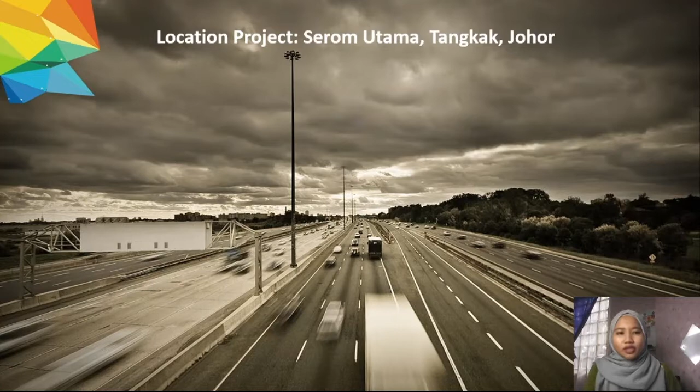Assalamualaikum, my name is Siti Nur Fatihah binti Abdul Jalil. I will present on the introduction of our project. Our project is located at Serom Utama, Tangkak, Johor, where the road is the main exit route to Tangkak and Muar. This is such a problematic and pothole road condition.

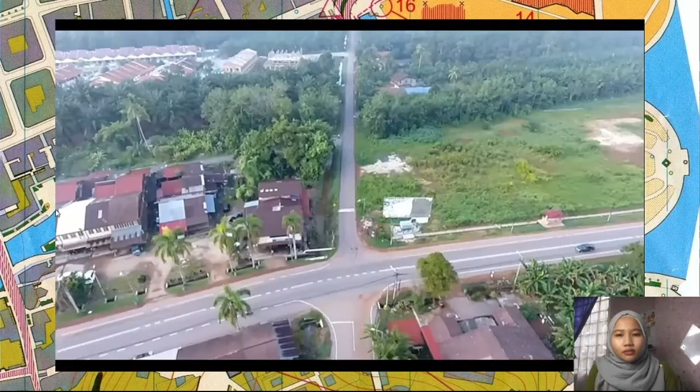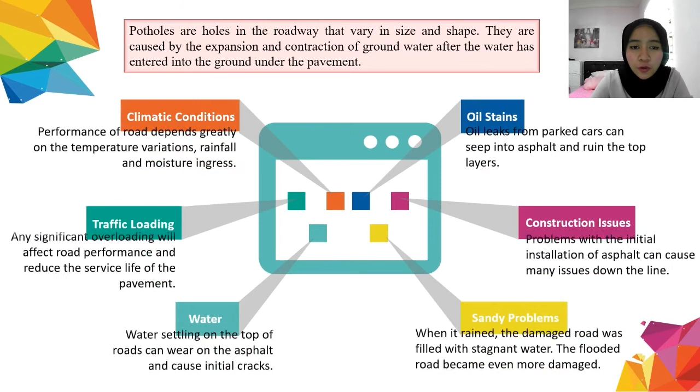Okay, hi, Assalamualaikum. My name is Edlina. I want to present my part. So, first, the problem statement. Potholes are holes in the roadway that vary in size and shape. They are caused by the expansion and contraction of groundwater after the water has entered into the ground under the pavement. So we have 6 problem statements, which are climatic condition, traffic loading, water, oil stain, construction issue, and also sandy problem. So first we go to the climatic condition.

Performance of road depends greatly on the temperature variation, rainfalls, and moisture ingress. So common failures resulting from climatic variation are swelling and shrinkage of road layers, thermal cracks, potholes, stripping, debonding, bleeding, and also raveling. Next one is traffic loading. Any significant overloading will affect road performance and reduce the service life of the pavement. So a few common failures resulting from excessive loading are shoving, rutting, fatigue cracking, and also depression.

So next one is water. Water settling on the top of the road can wear on the asphalt and cause initial cracks. So if water sinks into an already formed crack, it can cause further damage in the base layer. So the next one is oil stain. Oil leaks from parked cars can seep into asphalt and ruin the top layers. So if oil sits in the asphalt for too long, it will become very difficult to remove or repair.

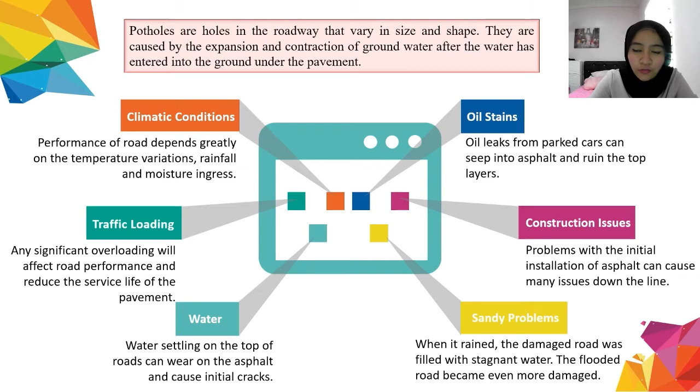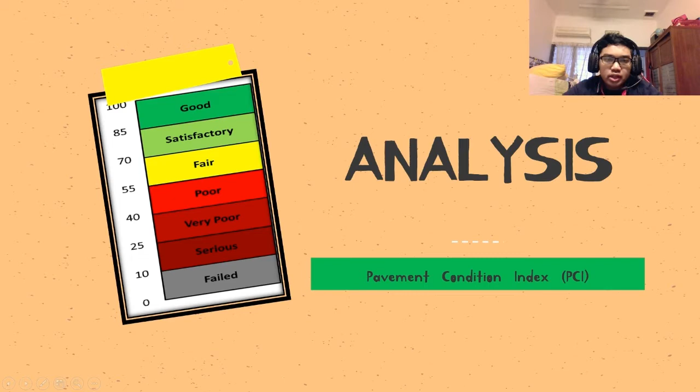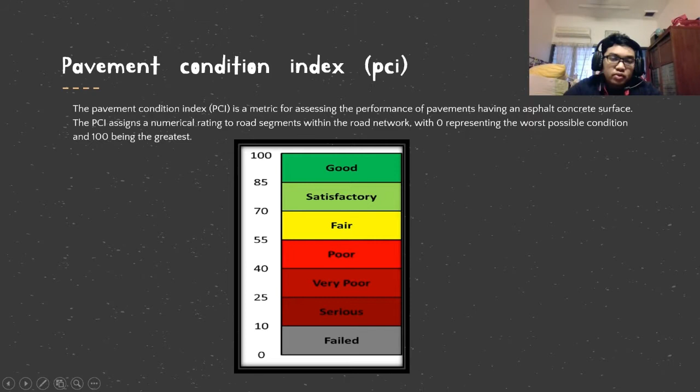Okay, hello, my name is Aiman Ilyas, and I will be representing the team for explaining the analysis, or more accurately, pavement condition index. So what is pavement condition index? Well, pavement condition index is a metric for assessing the performance of pavement having an asphalt concrete surface. The PCI assigns a numerical rating to road segments within the road network, 0 representing the worst possible conditions and 100 being the greatest. As you can see from the picture, there are a few categories: good, satisfactory, fair, poor, very poor, serious, and failed.

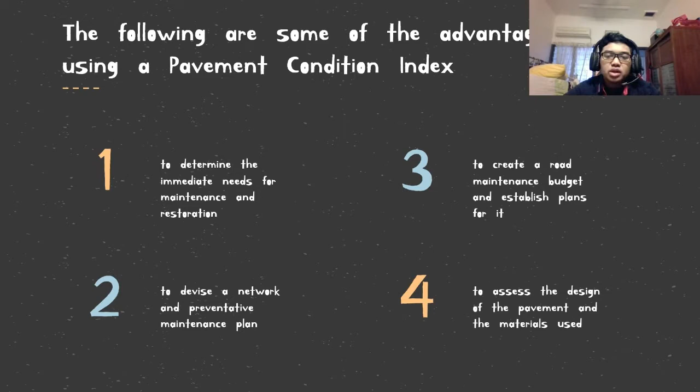The following are some advantages of using pavement condition index. Number 1 is to determine the immediate needs for maintenance and restoration. Number 2, to devise a network and preventative maintenance plan. Number 3 is to create a road maintenance budget and establish plans for it. Number 4 is to assess the design of the pavement and the material used. So firstly, we have to classify what type of damages there are on the sample.

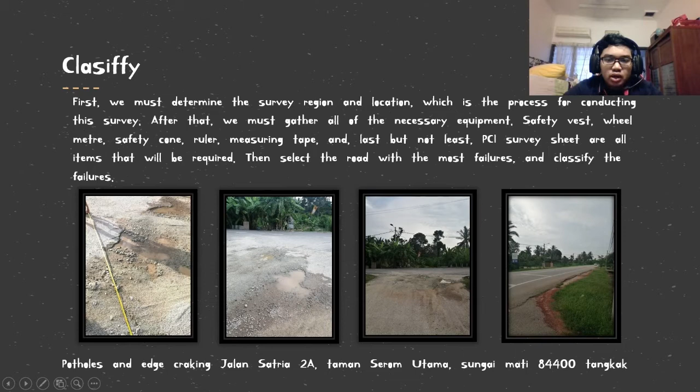So these are the pictures that we'll be focusing on. First of all is the asphalt pavement inspection sheet. As you can see, there's a total of 19 different distresses, surveyed by Akmal Daniel. One that we saw is edge cracking, which is number 7, and another one, number 13, is potholes. As you can see here, M means medium severity and H means high severity. There's also low severity, but we don't have any low severities.

For the potholes, we were told that rather than getting the measurements, we just need to get the number of potholes in the area. So there's about 5 big ones and 3 really big ones. So there's a total of 8 potholes, and edge cracking about 25 meters long. So if we know that, we can get the density of each of the distresses, and we can use this table on the right here to get the deduct value.

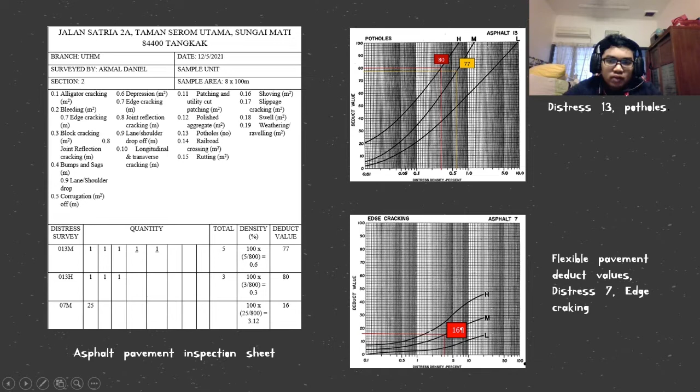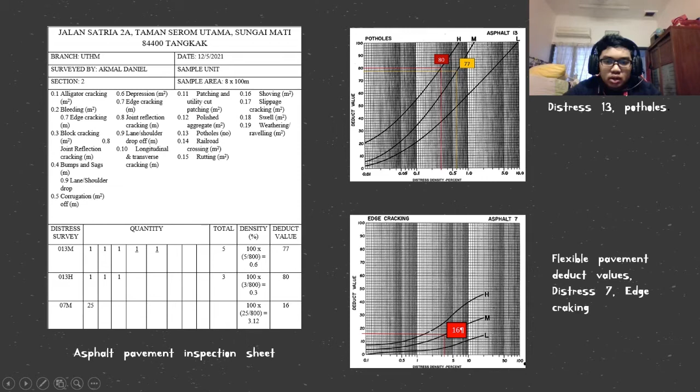We plug in the density that we got. Let's say here is 0.6, right around here, yellow color, and we get the deduct value of 77. Same with the other one. We plug in the density and we got deduct value 80 for high severity. And for the edge cracking, it's a different graph. There's a different graph for each of the distresses. For edge cracking, there's a medium severity, 25 meters long, and we get the density of 3.12. So we just plug in 3.12 on the x-axis, find the deduct value, and we got 16.

So first we determine the maximum allowable number of deduct values, m. HDV, which is the highest deduct value, is 80 from the survey sheet. It's 80 right here. So we plug in the formula right here. The formula is m = 1 + (9/98)(100 - HDV). Plug in and we got 3.83.

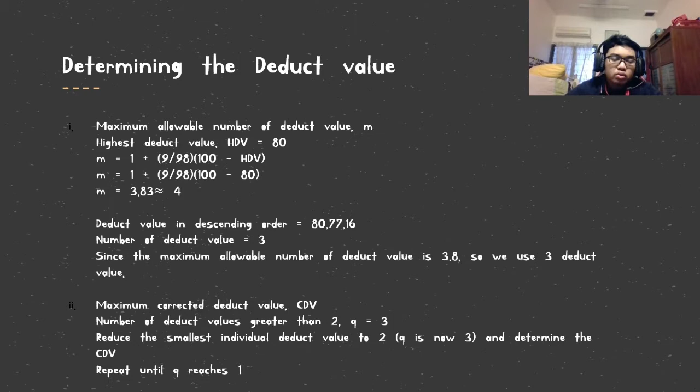So what does this mean? Here are the deduct values in descending order. The number of deduct values that we got is 3. Since the maximum allowable number of deduct values is 3.8, or rather 4, we use only 3 since we have only 3. For the maximum corrected deduct value, the number of deduct values greater than 2 is q, which is 3. Reduce the smallest individual deduct value to 2, and determine the CDV, the corrected deduct value. Repeat until q equals 1. So there's 3, right? So from 3 to 1.

So here we plug in the deduct values and total them. This is the total deduct value. This is when this graph comes into play. We take the highest total deduct value that we got, 173. See this line here, there's q equals 1, q2, q3, up to q7. We only have q of 3, so we use the middle line right here, q equals 3. We plug in 173, the total deduct value, and we got a max corrected deduct value of 97.

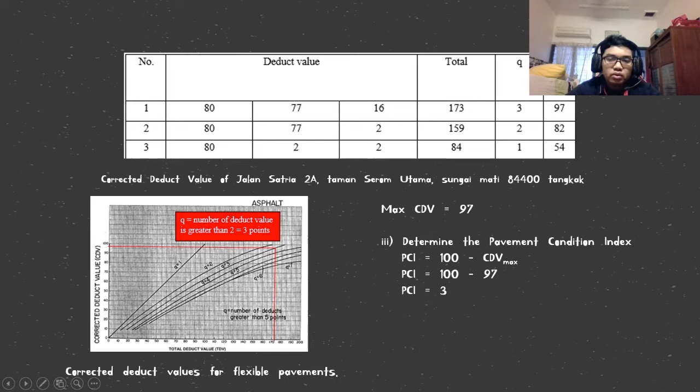After that, it's pretty simple. Determine the pavement condition index. We just use 100 minus the max corrected deduct value, and 100 minus 97 is 3. So now we know it's 3, it's in the fail zone. The PCI value we obtained is 3. Based on the PCI rating, this section of pavement is in failed condition. So what does that mean?

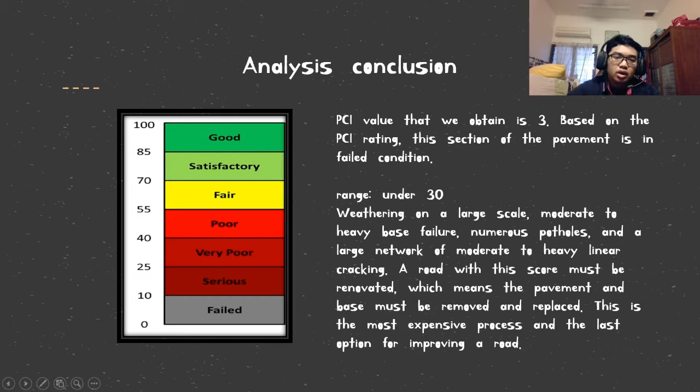Weathering on a large scale, moderate to heavy base failure, numerous potholes, and a large network of moderate to heavy linear cracking. A road with this score must be renovated, which means the pavement and base must be removed and replaced. This is the most expensive process and the last option for improving a road. So that's the conclusion of the analysis. We got a PCI index of 3, in the failed category.

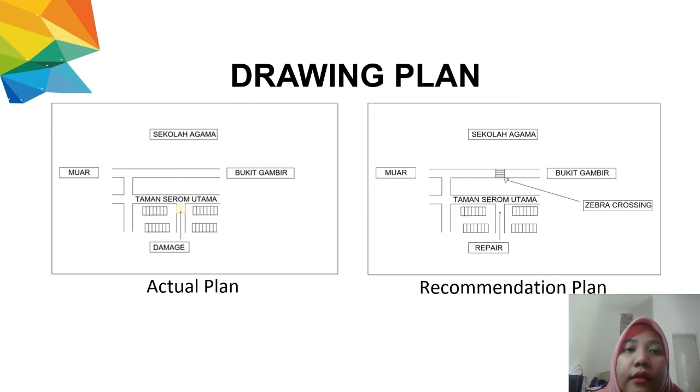There are 5 methods of pothole repair. Firstly, throw and roll pothole repair. Throw and roll repair is often known as the most basic pothole repair procedure. It is a temporary solution to pothole problems. All that's required is to pour the asphaltic repair materials into the hole and then drive over it with a big vehicle, such as a large truck, tractor, bulldozer, etc. It is truly that simple.

However, because of the high failure rate of this approach, it is recommended that it be used only when absolutely necessary. Alternative ways are far more cost effective. Second, semi-permanent pothole repair. While it might sound a bit iffy since it is not fully permanent, this method is considered one of the best, beaten out only by full depth roadway replacement.

First, remove water and debris from the pothole, and then make clean cuts along the sides of the pothole, essentially trimming it back so that the new hole is based in sound pavement. Insert the patch mix material into the hole and compact it using a vibratory roller or a vibratory plate that is smaller than the patch area.